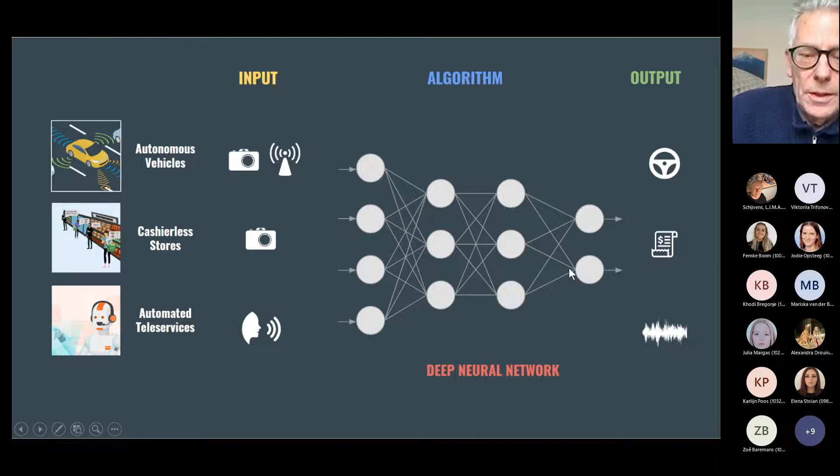Here you see also what AI is capable of, and that's why it will be automated, and why thousands of millions of people will lose their jobs. In Qatar, I had a discussion with a local architect, and he expected that 1 million of the expat jobs, that is the workers for infrastructure and the stadiums, will lose their jobs and be replaced by machines, and that only 10% of the jobs will remain.

And I think he's right, this will happen. So we have to work with this.

So it's a variation, a capitalist variation of communism actually, that the land belongs to the people, not to private owners. But it's a combination: it's privately owned, but you are entitled to get your share. That share in Dubai is quite big, more than 1,000 square meters. You can build anything on it, and you can use the garden for growing stuff.

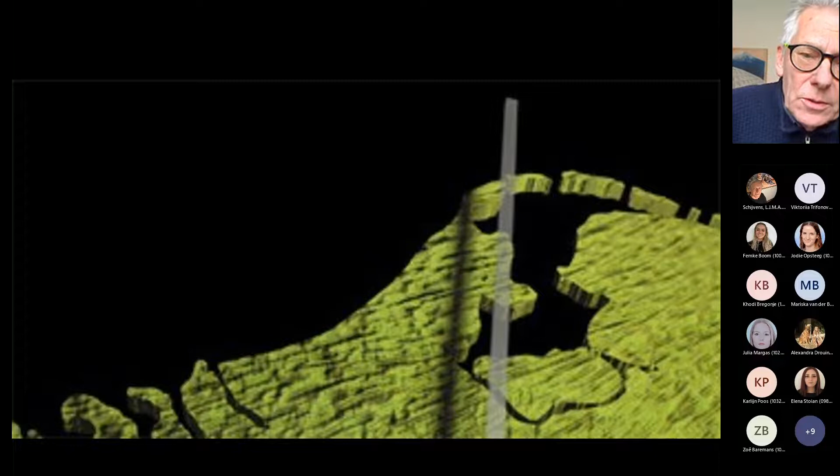And at another plan in the same period, I had this design for the polder, which is not the Flevoland, now the Marker Waard polder. Well, it didn't happen. It's now a nature reserve, which is actually a better idea.

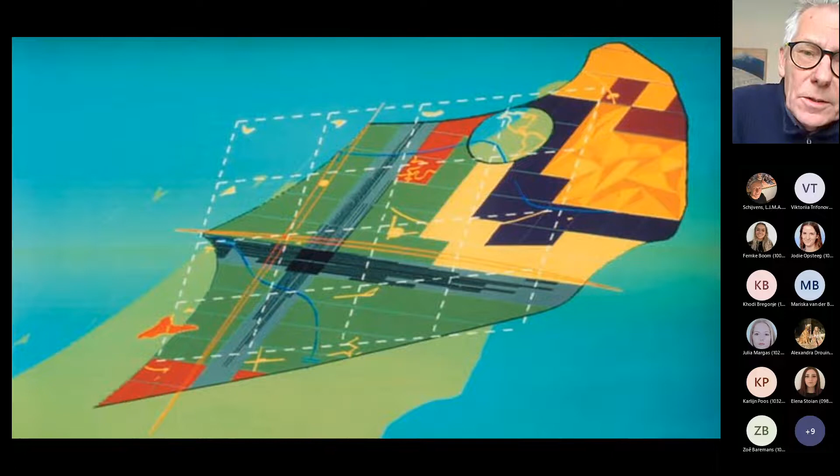But there was a competition for this, and then I had this XYZ system of endless pieces of land available for the people. And this is really a different story than traditional urban planning. It's actually allowing for growth.

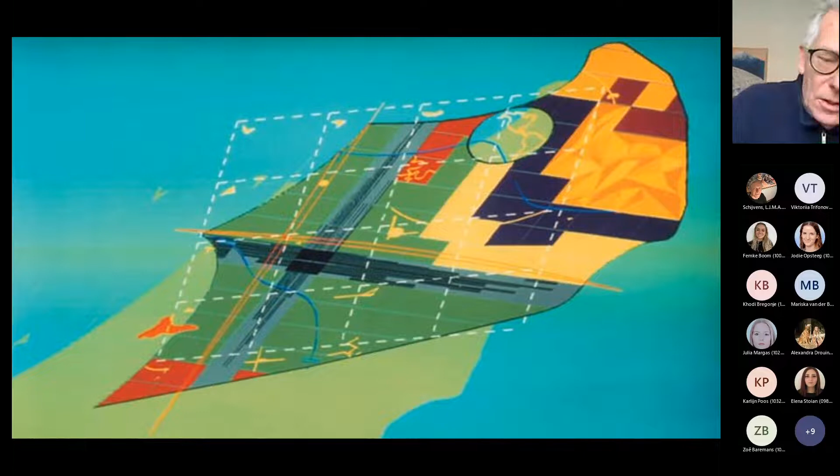One simple rule, again, just one simple rule: have a piece of land and then get your freedom within that single rule, and create complexity from that simple rule. I think it works like that. I think it would also work for energy, water, and food production.

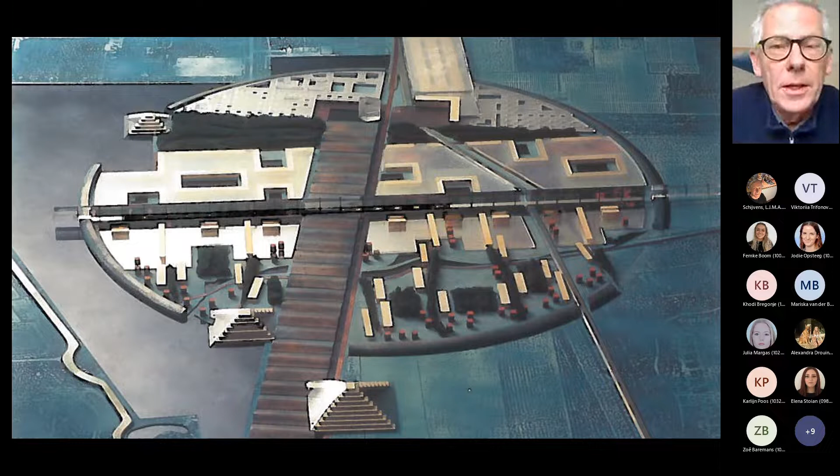So I have a few examples of our thinking, early thinking, I have to say. This is an urban design we did with Ashok Bhalotra, a well-known urbanist in Holland, of Indian origin. This is a project we did for Dordrecht, where we had 1,500 houses that produce their own food and even produce food to export.

So it's also a small factory, like a town as a small factory. At the top you see a parking with all the cars parked there. They actually produce CO2, and that will be used for the glass houses.

You see patio homes, row housing, freestanding houses, the whole normal range of housing. And you see bigger pyramids, but all of these elements, all of these typologies produce food.

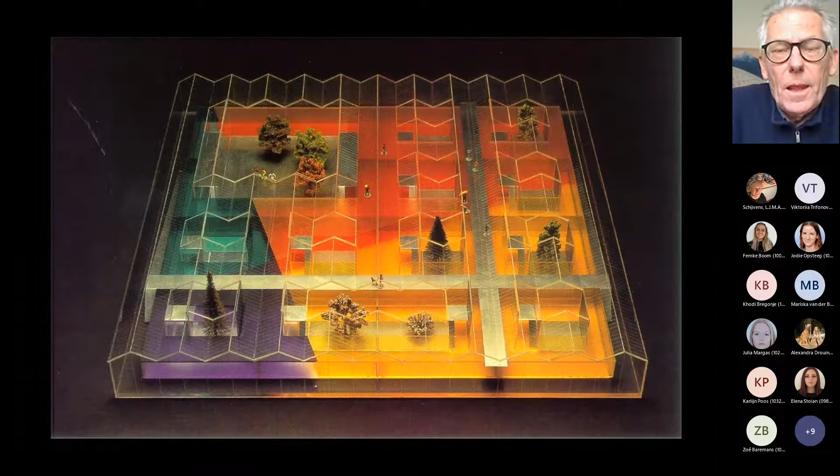This one is patio housing, so you live on the ground floor. And that was one of the ideas: maximize usable space on the ground floor and use the roof for growing food. This is both collective and individual, so it's a merge of production and consuming.

The other example in the food production chain has to be brought as close as possible to where you consume it, because that's the basic idea: produce anything as close as possible to where you actually use it or eat it.

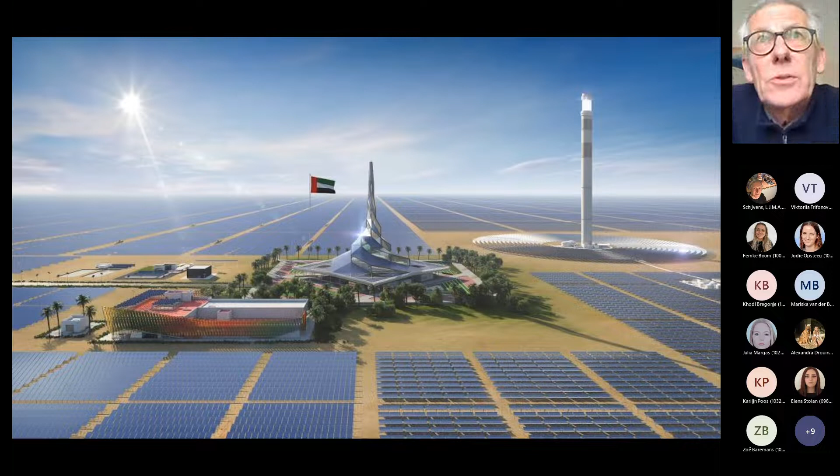So let's apply the same idea to energy: produce energy where it's used. You can consider this at three levels, I think. National level, so produce in your own country or area instead of importing gas and being dependent on the Russian pipelines, etc. I think that's a good idea, and why not.

This is again an example from Dubai. They really invest in this, and of course much of it is a PR activity in Dubai, but still they are serious about it.

The third level is, of course, your private level, your house or your apartment building, where you say okay, this is where I live and I produce energy.

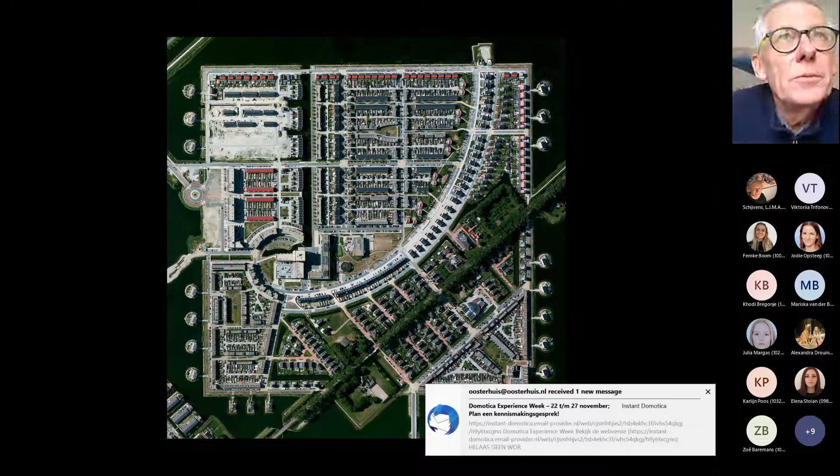So the idea is, when we divide the responsibility for producing energy each one-third — say national installations do one-third, the community does another third, and private persons do another third — if you bring that together, I think it would be an easy target to manage the clean production of energy.

So as close as possible to where you live. But again, we have to consider all the different scales where you live — it's not only your house, it's also your neighborhood, it's also your city.

Water production is, of course, just as important, actually, but more difficult to actually obtain, to create water. How do you create water?

In countries near the sea, they do, for example, desalination plants — they take it out of the sea. That's a possibility; we can do that too in the Netherlands, but there are other areas where it's much more difficult, like in the desert.

Then they have to squeeze it out of the air, by condensation. They have infrastructures like this, and these produce tens or hundreds of liters of water, potable water, drinking water, per day.

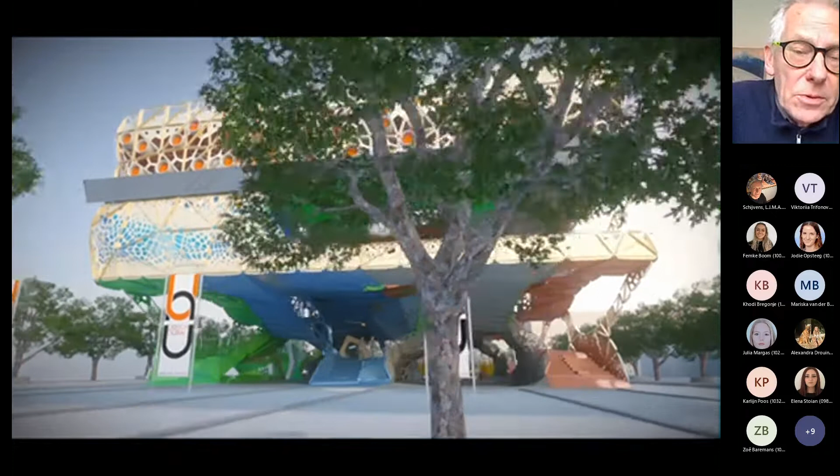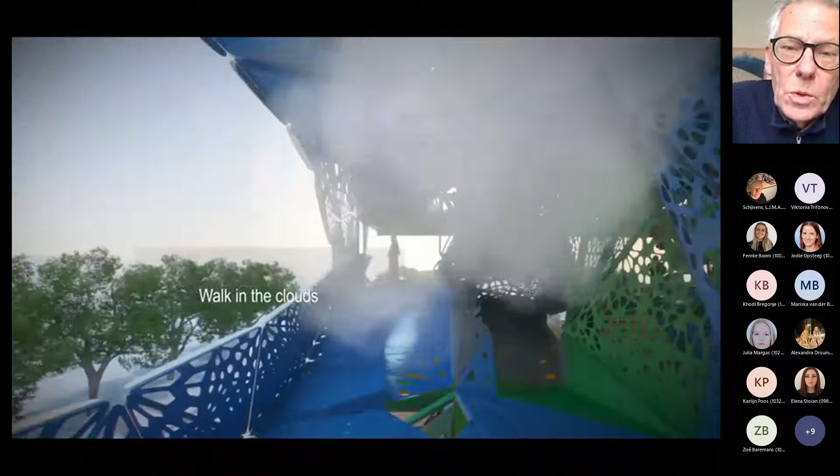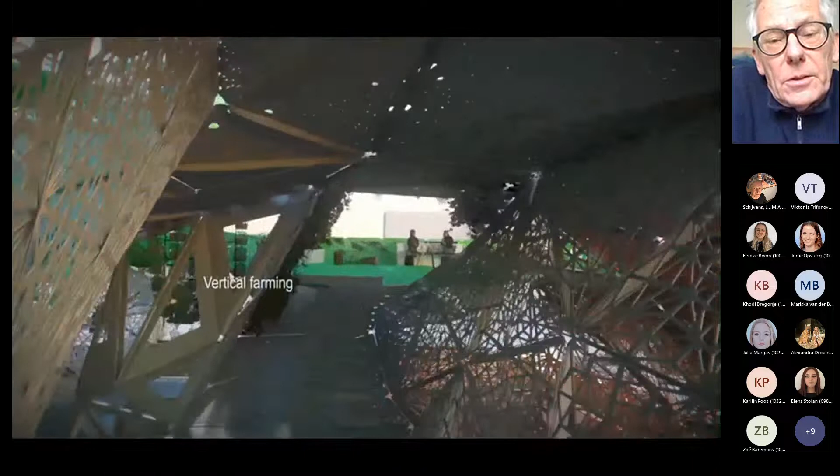This is the pavilion that we designed ourselves. It actually does exactly what I described in the earlier points. We produce energy here, by and large on the highest level, but also by integrating solar panels in each of these components. We produce food for the restaurant, like the example that I showed you, and we produce water. And the theme for the public is actually to go through this pavilion via three trajectories that explain everything about food, water, and energy. It culminates in the top where it is actually produced.

But we didn't specify exactly how. We did some calculations, but we didn't make it to the final round, so it stops here.

The other idea in this pavilion, and you can see it's a very particular way of designing, is to have one component for floors, for balustrades, for facades, for anything basically, in a parametric system that fits to all situations. So with one component parametrically designed and robotically produced, we can make anything.

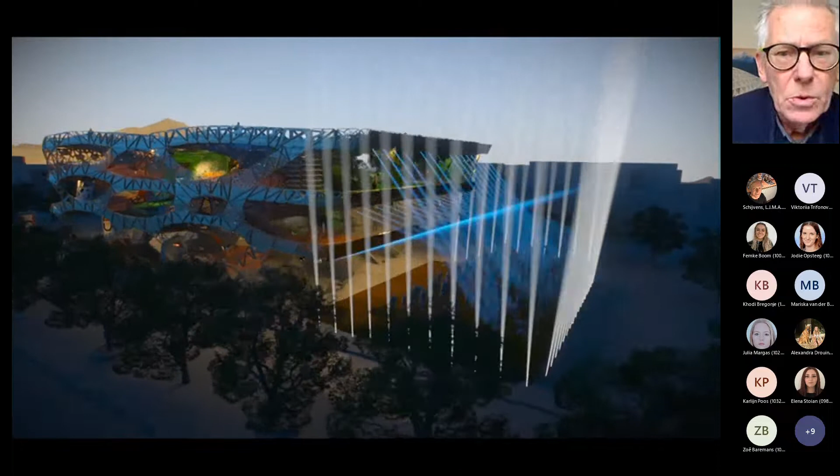And this making anything is really an important issue, because complexity is no longer something that is exceptional, but complexity has become something that is normal. It's the new normal, another normal, which emerges out from simple rules.

So basically you cannot do much simpler than this. It's really one component, and the position of that component, the array, the numbers, the frequency of the number of components, the position of it, defines what exactly is the shape, what are the dimensions, and what is the level of perforations, etc. So this one component fixes everything.

I said okay, I have these three elements: farming, water harvesting, and energy production. I put three extensions on top of this building to produce what is needed for this location. And it's quite a big thing, so these extensions are quite big. I think this looks to me very much real.

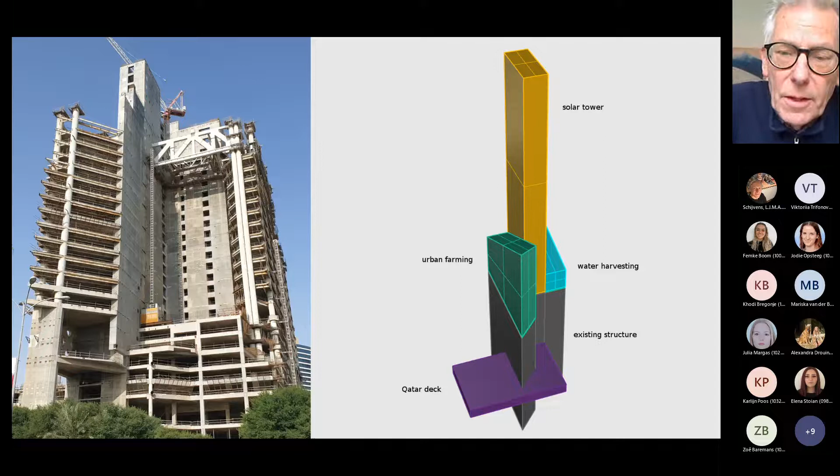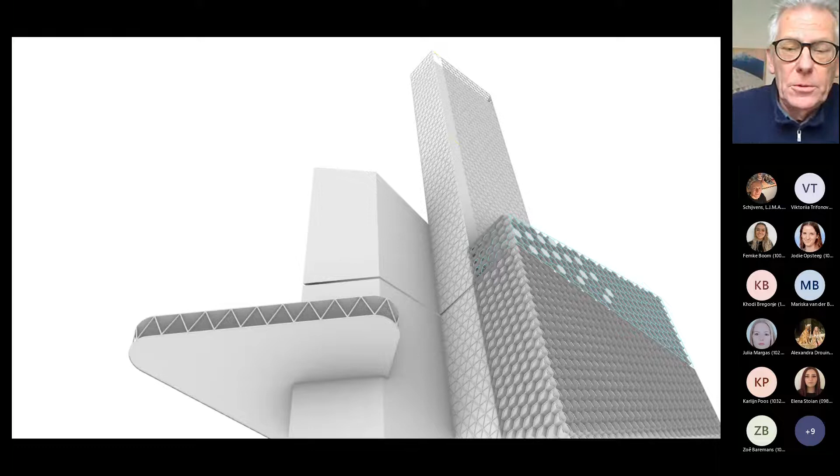What is the task, which is actually the challenge, if you are really serious about producing more locally and consuming what you have produced locally? The building becomes bigger, also more transparent, and becomes a small factory almost. Each building, a house, an office building, a city, and this of course you would need an architecture to unify into one structure, but that's another story. It's first about the calculations: what is exactly the need for the production of food, water, and energy.

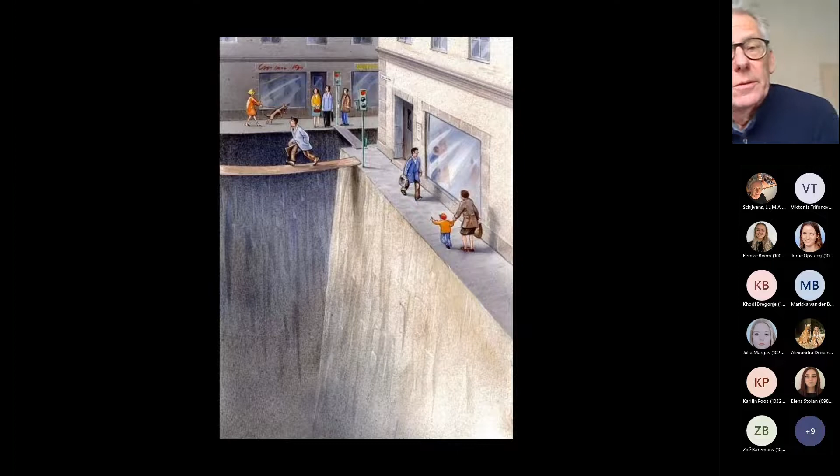Okay, let's look at autonomous transportation. These are one of the other elements that needs to be linked to the previous ones to become successful, because none of these issues is a standalone issue. If you decide to go 100% for only one of these, not much will happen. Only when you link everything together will it become something more successful.

So this picture shows the real situation of inner cities. I think it's quite evocative. The pavement is very small. The street is just an abyss. It's a big canyon. You cannot go there, and going to the other side of the street is also a challenge and quite risky.

Automated, autonomous vehicles are vehicles that look to each other, like birds in a swarm, exactly like that. They only look to nearest neighbors, and they measure distance, they measure speed, they measure direction, and they adjust to each other. No one is leading. So if one of these cars steps ahead and goes to the front, he will be looked at by the others in the same way as he is looking at the neighbors right now. That's the condition of the swarm.

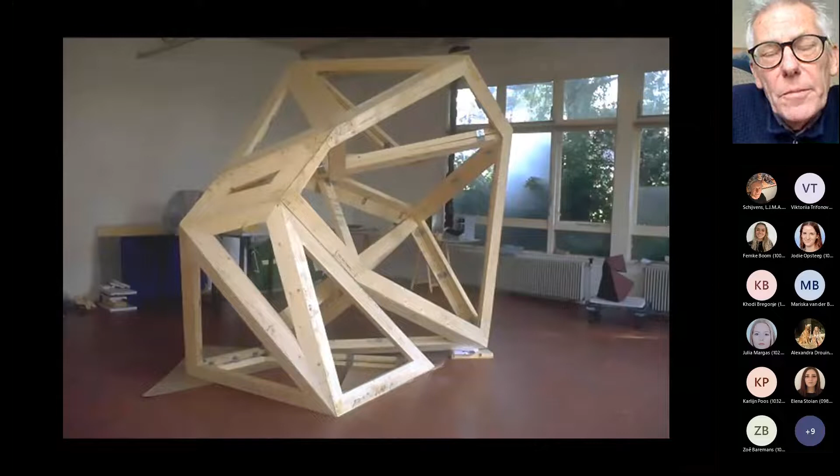And then assemble them to form the whole. So this is, in very short, the method we have applied since for almost any of our projects: it starts digital, then you translate your digital sketch into components, and then you assemble the components to form the larger picture, the larger whole.

This was meant as a sculpture, but we could also see it as a prototype for a larger building. This happened in 1991, so this is 30 years ago.

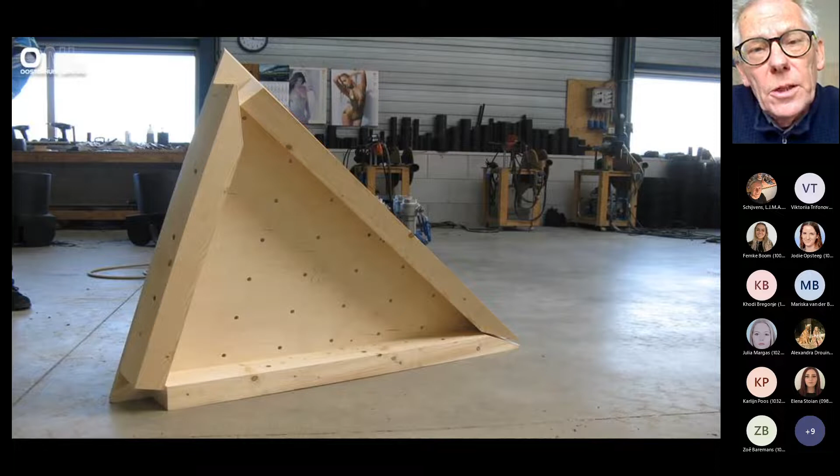10 years ago, I did this project for a climbing wall where I had this component developed much farther, fully parametric. So the previous one was much more analog, actually, very experimental. This is fully scripted.

Each component of the climbing wall is different, but all of these components are looking to each other and they adjust to each other to form the bigger picture.

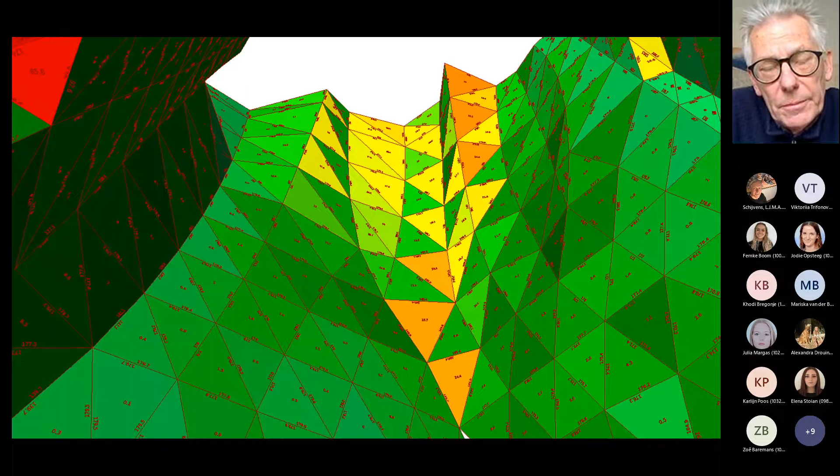In the script, you also measure the angles. If the angle is too big, you have this red alert, which you see in the left. And then we have to adjust the model manually to reduce those excessive angles, because we don't want exceptions.

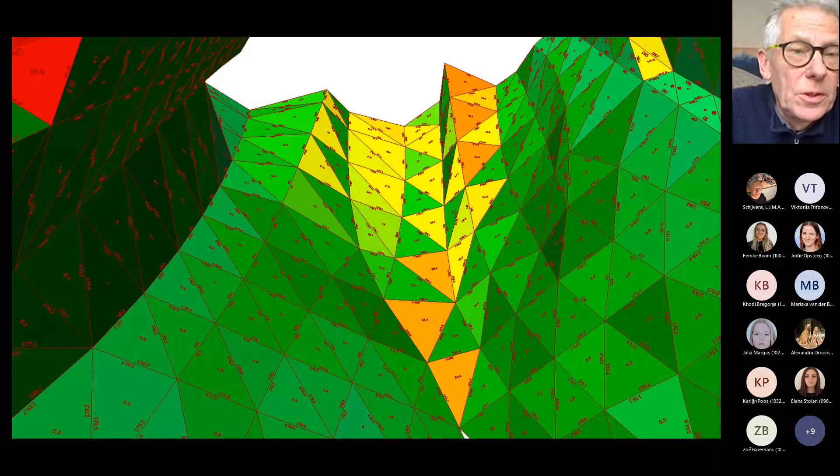We want to have a system, which sets the guidelines, sets the framework, and we want to work within that system. That system is based on this one single rule that creates a pleasant kind of diversity, where every single component can be different, not necessarily, but can be different, and is assembled to form the whole.

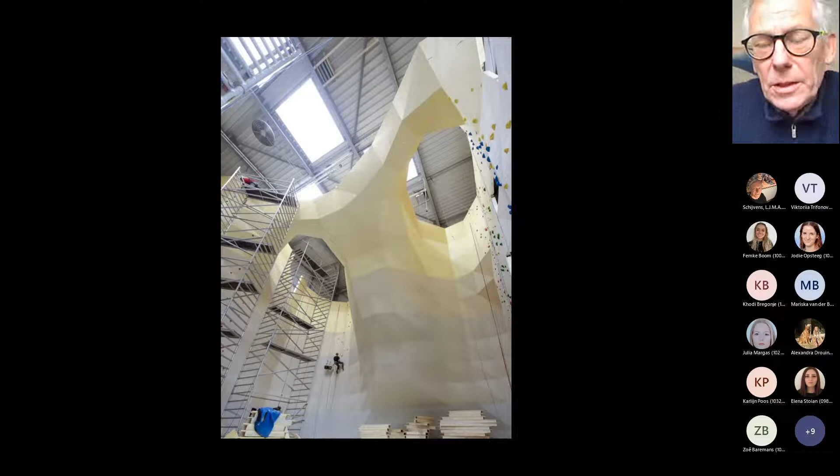And it's just as simple as that. You have this stack of components that you put on the ground. They are all numbered, they all have their identity. This is crucial. Everything needs to have an identity.

Like every computer has an identity, like every cell phone has an identity. Every single component that connects to another component has to have an identity. It's not the emotional identity I'm thinking of, but simply something that is needed to be addressed, to receive information, to process information, and to send out information in a different form, which is a difficult way to describe a dialogue. So this is what happens.

Then what can happen, and what we realized in many different versions, simple components can create a form of complexity that you otherwise would not be able to do.

So we use this technology to transform complexity into the norm, into that other norm. Only because we can control the system from scratch, we can control the system from scratch with the maker, which is the steel manufacturer.

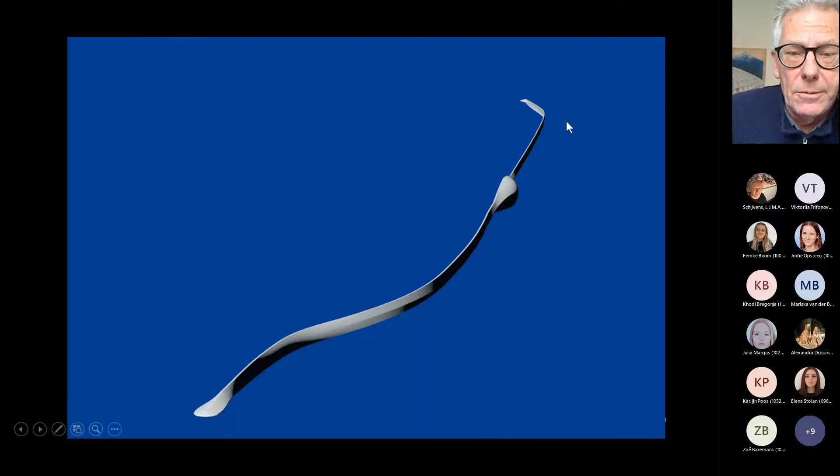The cockpit that I showed is only part of a bigger thing, which is an acoustic barrier. And here you see already what I meant with looking at cars. You really have to look at these fold lines, which are normal in cars, but not in buildings, really.

And what these fold lines do is reflect the upper part, reflecting the sky in the upper part, so it looks lighter, and reflecting the earth in the lower part, so it looks darker.

That makes it much more elegant, and it makes the building look longer than it is, and that's what we want. We want this stretched idea of the 1.6 kilometer experience driving past this acoustic barrier. Driving past means you experience gradual changes in the geometry, from convex to concave, pumping up where the cockpit is, and then fading out again.

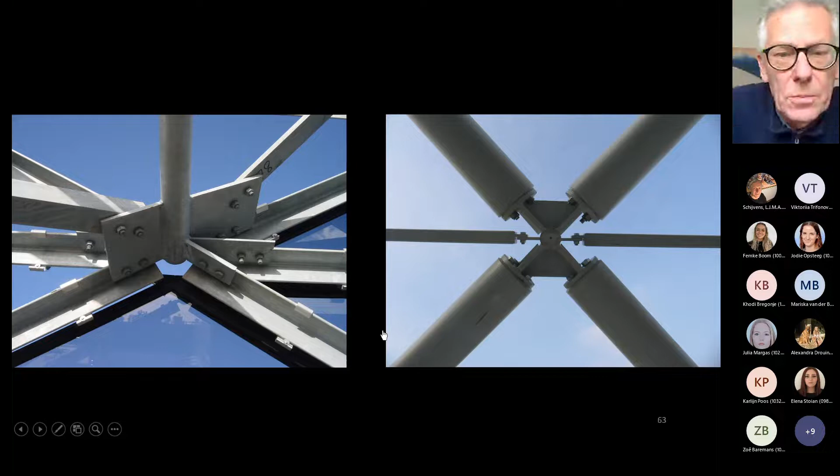One component adjusts to this difference in geometry, the pumping up of the volume. These are the two very simple details that are at the basis of it. But remember, none of these is the same—each node is different, has its own number.

Each component and subcomponent has its own number and is connected to each other in this one particular way. All this comes out of our scripts. So all these triangles for the glass plates all have their unique dimensions. Doesn't look like it from here, but it's true. Same for the cockpit itself. We processed the whole design in ProEngineer; today you would use Grasshopper, as we did for the climbing wall.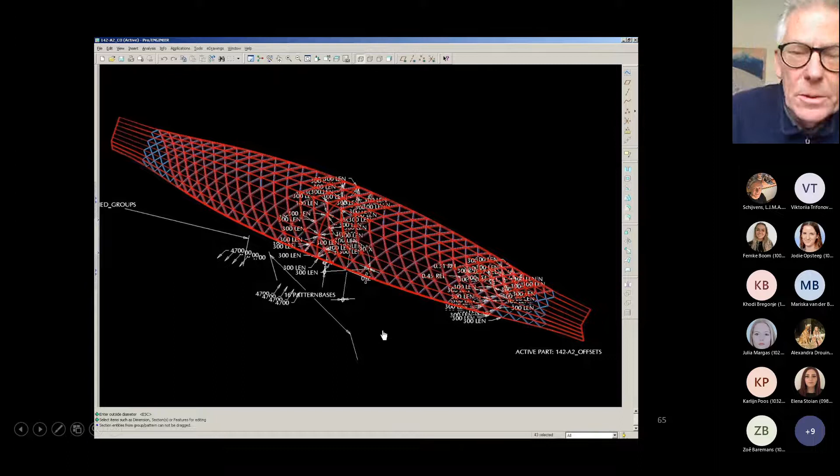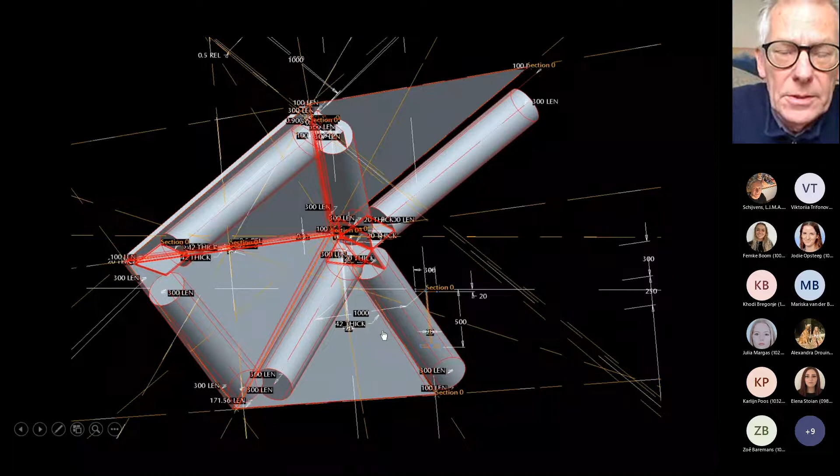And here you see the painfully exact detail of every single node, and the data are extracted from this node and communicated with the machines. All the differences in angles, all the dimensions of the components, subcomponents, all the parts, the position of the bolts—everything is in this detail. And this one detail actually is the building. There's nothing else. This is it.

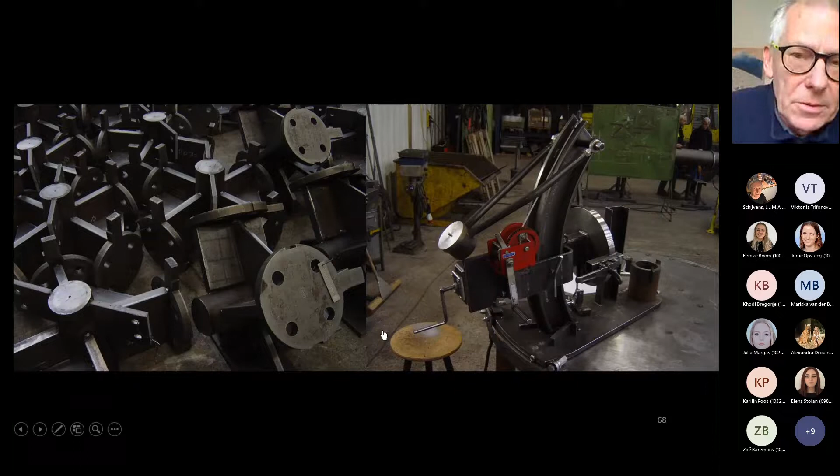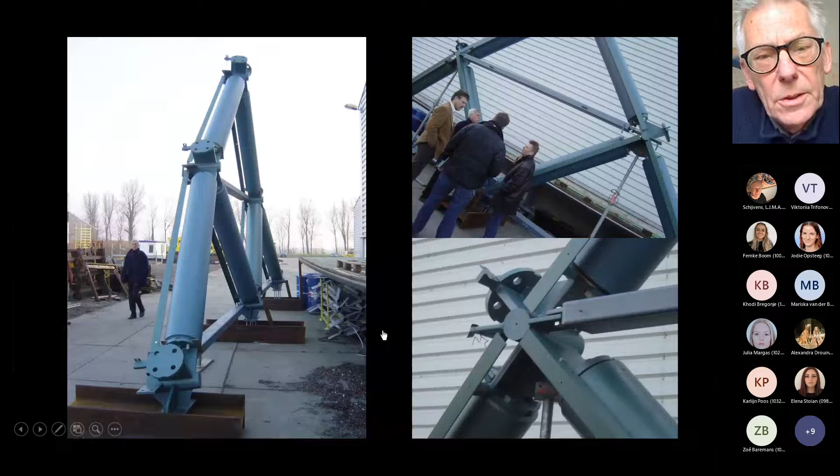So this is the extreme simplicity, a simple rule that creates the diversity. Don't think it's difficult to make—it's not. You can use any workshop and your inventiveness to build a machine to control all these angles. It's not difficult, it's actually very doable, and it has a lot of advantages because you don't need a lot of other players.

You don't need many consultants, you don't need that contractor subcontracting the steel manufacturer. You work with the steel manufacturer directly, and he has the calculation office to make all the calculations for the nodes. You don't need an engineer for that, really not.

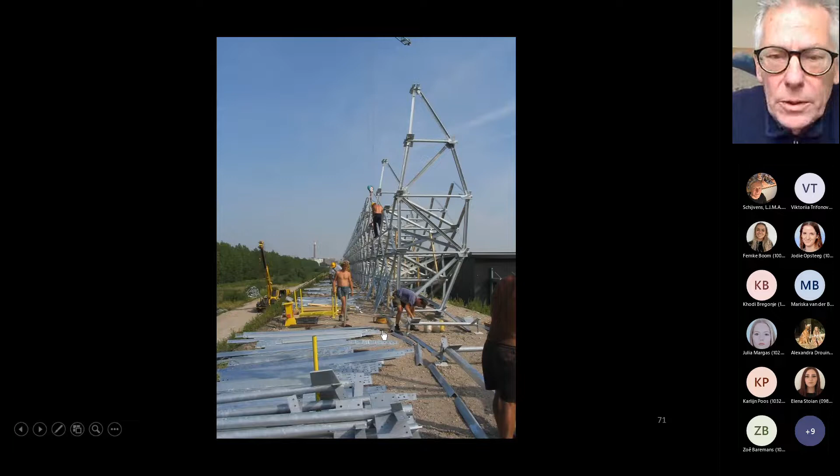Building a prototype is necessary to see how it behaves, and this is very typical for any larger project—you build prototypes first. If it's okay, then you're good to go and you start assembling it, just a few people doing 30 meters a day, building up the acoustic barrier and the cockpit.

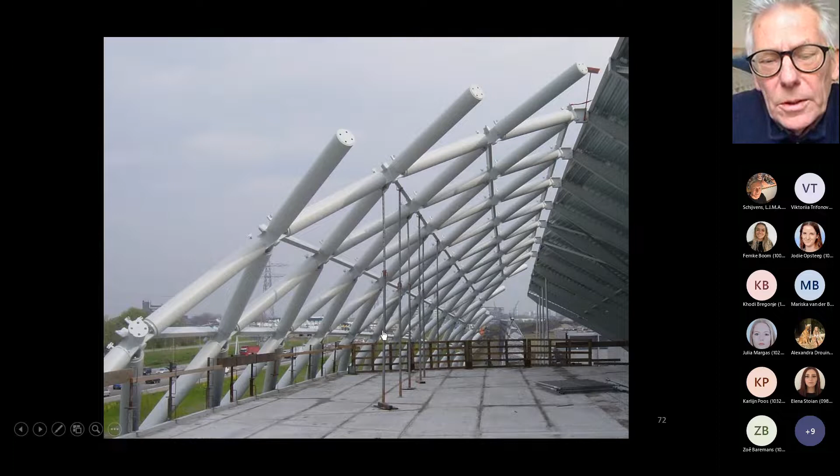So you see how it works—you simply connect one component to the other and it builds itself. You don't need scaffolding. The vertical components you see there are not scaffolding; they don't bear the structure, they're just for checking the dimensions.

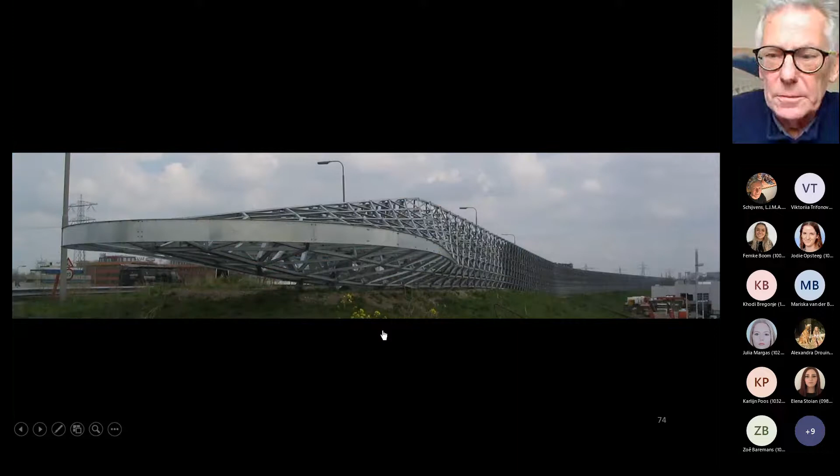Here you see the two structures being built and approaching each other. We had two clients, one for the cockpit, one for the acoustic barrier, and we synchronized them into one structure—they didn't have to talk to each other. Then it comes together smoothly, effortlessly, and you see the folding lines being transferred from the acoustic barrier into the cockpit.

But these are two separate buildings. They don't even touch each other. They don't have to—it's just the visual aspect that has to be continuous.

Well, you can actually recognize a good building if the logo of the building is actually connected to it, if they use the building itself as their logo. That's what they call iconic, of course. But this is literally iconic—they use it as an icon, which is a sort of sign.

Iconic in this sense, I very much support, and it means the building has character. It's not about being strange or wild or just decorative in some way. No, it's about being essential, and being able to use the essence of the design as an icon.

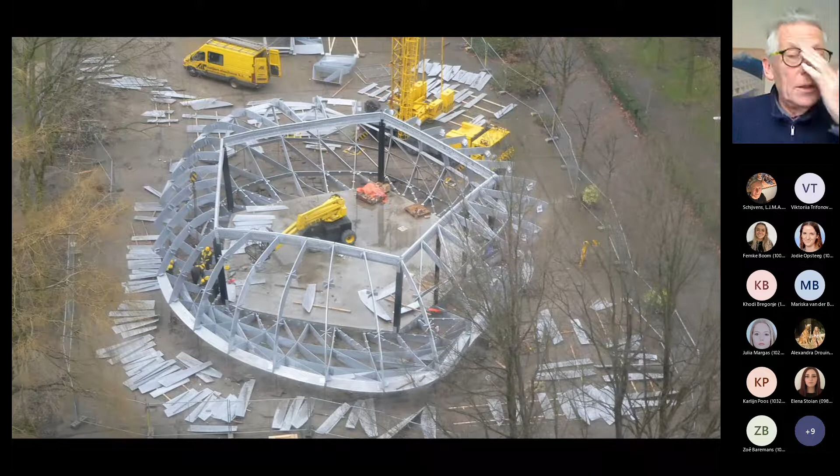More examples, smaller pavilions like the IWeb in front of the faculty. Again, one building, one detail, an assembly of components. I can show many of these projects, and they have the same principle all over, but they're all different, and they don't even look like each other.

This is the interior, where we used polyurea foam for the insulation and for the seating arrangement. The building itself forms actually the seating arrangement around the central arena, which is the virtual working space. We use this as the proto-space laboratory of hyperbody.

This is the Balna, so you pronounced it properly - the Balna in Budapest. This is the interior, so here we have the same system, seemingly the same system, because it has been built as the cockpit, but made in a different way. Actually, they used welding on site, which I was very much against, and which caused some imprecision in the whole structure. But from a distance, it looks okay.

It's also considered a very successful merge of the traditional and the new, and the public, and actually also the critics and experts - they really like this building as much as we do.

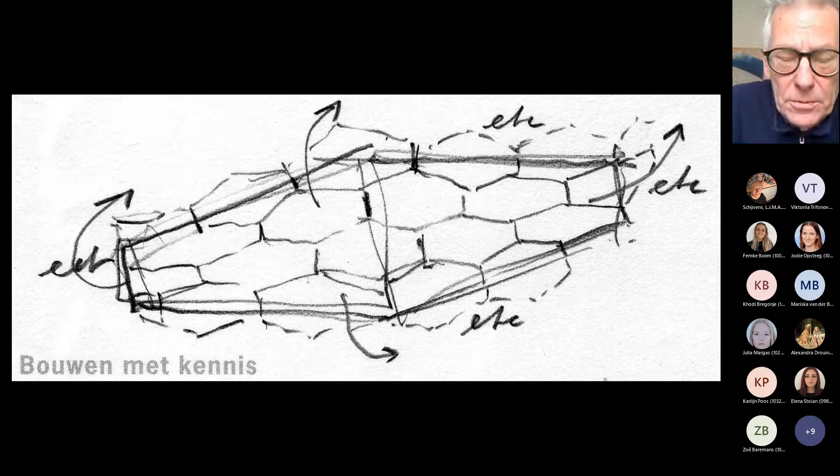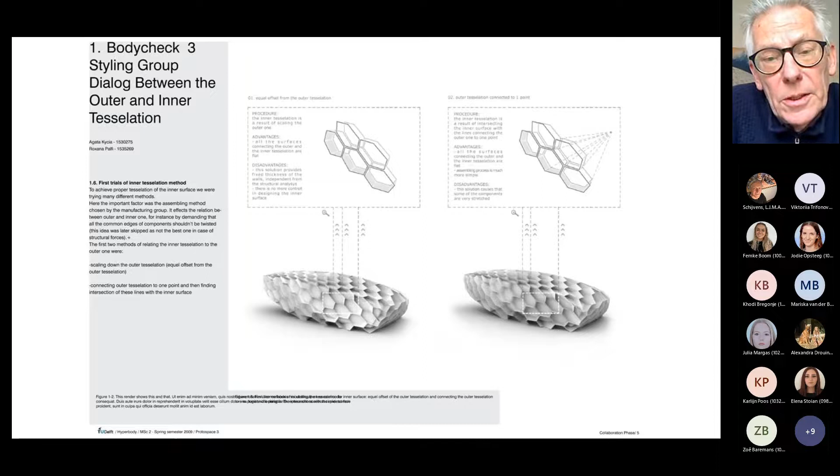Okay, let's have a closer look at the idea of the components. Each design deserves its own unique component, and it's always different because it really depends on what you are designing. So here, with a number of students, we tried to have one component that is part of the swarm of components that does everything - the insulation, the windows if you need to look outside, the structural properties, the tactile properties, everything, the aesthetics, the styling issues.

And we came up with this proposal. We called it Protospace 4.0. We wanted to build a new pavilion, but unfortunately, due to the crisis and the reduction in budgets at universities, we didn't get the budget to build a new pavilion for ourselves, so we had to limit ourselves to a prototype.

An aspect that is especially important here, and for anything you do, is the connection between the components. It's not the component itself that is important, but just as well the connections between the components. This is the analog version, the connective analog version of communicating in real time, the connectedness via sensors and actuators. In the static building version of connectivity, it's just as important to look at the connection, and the connection has to be integrated in the system, not something additional - no wet connections, only dry connections, so you can assemble it and also take it apart and build it somewhere else again if needed.

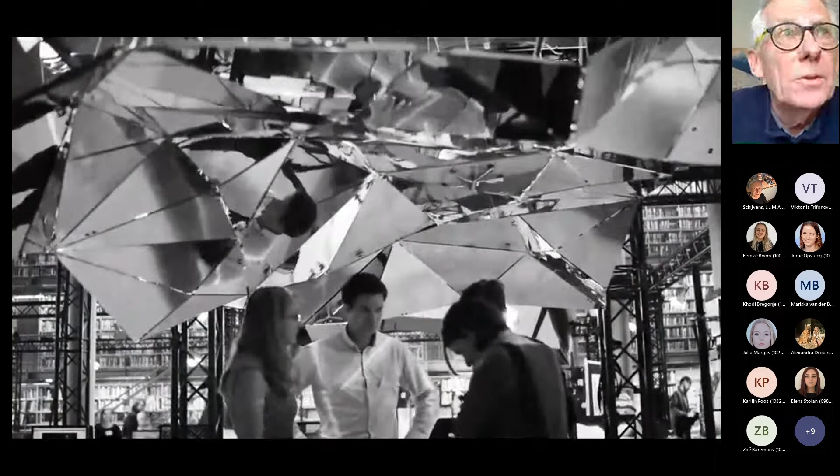Again, it's not difficult - it's just a matter of teaching yourself Grasshopper, in this case, and then do whatever you want to do. It's almost a democratized way of designing, because basically the way of designing is also open for other parties. It's a very transparent way of design. It's also an inclusive way, and it allows for participation, which is one of the main promises of interconnectivity between things and people.

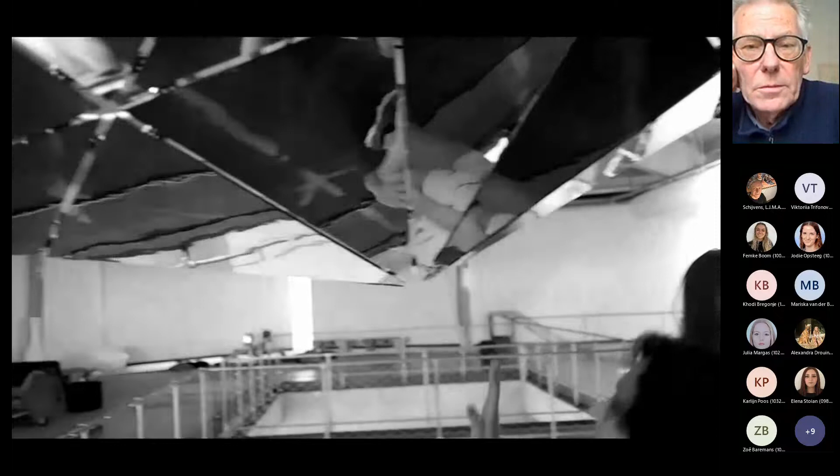This is an example of an interactive installation - an interactive mirror.

It's not difficult to imagine. Gus, your sound is not good. Oh, we can do without sound. No, it's better now. But because this was the video sound. Oh, okay, so forget about the sound, it's not important.

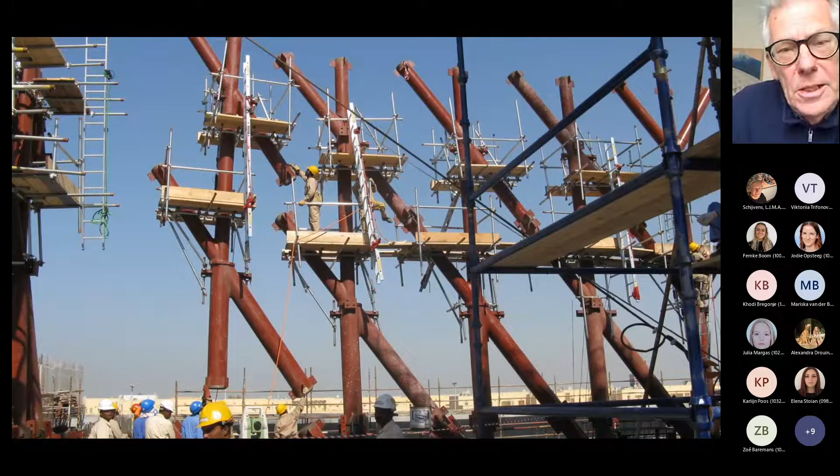Okay, then we apply it to many other buildings. This is a building in Abu Dhabi, and you see it has a completely different look. But again, same principle, same principles of that component that is leading everything, leading the main structure, leading the facade, interior finishing, everything. And it really works on all levels.

The client wanted to see the steel because it was an offshore builder. He really liked the presence of these steel structures, so that's why we left it exposed.

Now a completely different thing, because we are talking to first-year students. This is a first-year project done at Qatar University, and these students didn't know anything about computation, but it was interesting to see how we could teach the principles of parametric design in an analog way. I have to say, because I did this together with Ilona, we asked the students to find a component that is different from other components, so not a repetitive or repeating component, but a unique component, and put them together in any way to design a big urban public sculpture.

So you have to imagine these are 60 meters high, placed in a public space, also interactive in some way. So you see completely different interventions by the students.

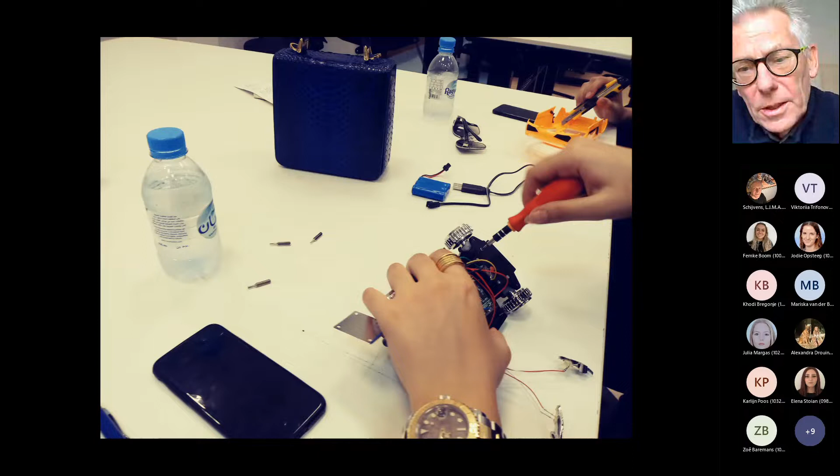And the most interesting one was this one, where we disassembled a vacuum cleaner, a robot vacuum cleaner, and saw how that worked. I also asked the students to put it together again and make it work, which was the biggest challenge, of course, but most of them succeeded. So it was very interesting.

The other project I want to show you from Qatar is this robotic project we did. Here you see Ilona, and that was our friend Jasmine in Qatar - she's an architect. And we used these robots, these vacuum cleaners, to create two paintings.

One additive, where you add paint, and one subtractive, where you subtract flour from a field of flour that we distributed on the floor. Here you see how it works - we connected an acrylic marker to the end of the vacuum cleaner for the additive painting, and we programmed the other vacuum cleaner to go in circles for the subtractive painting. So these robots can be programmed - that's interesting. You can actually use them as your own extension, as a painter.

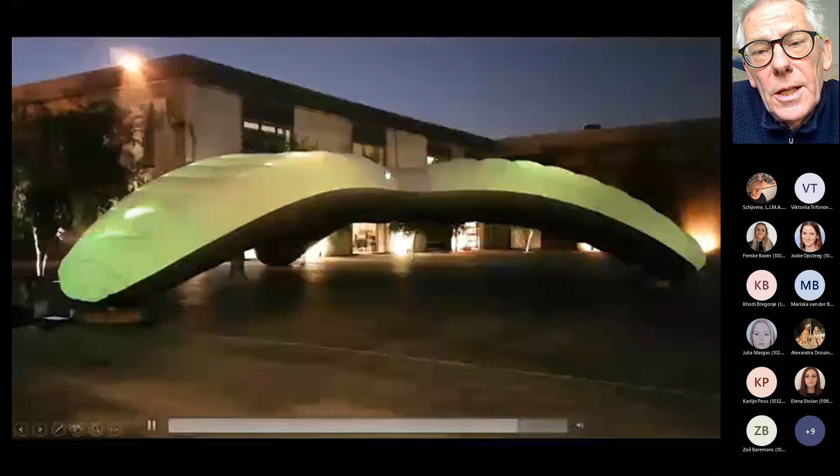You don't hear it right now, but it changes the character of the sounds, and then it also changes its shape, because the sectors in the middle are alternately deflated and inflated. It deflates the whole thing lower, almost crashes it, and inflates - different levels of interaction.

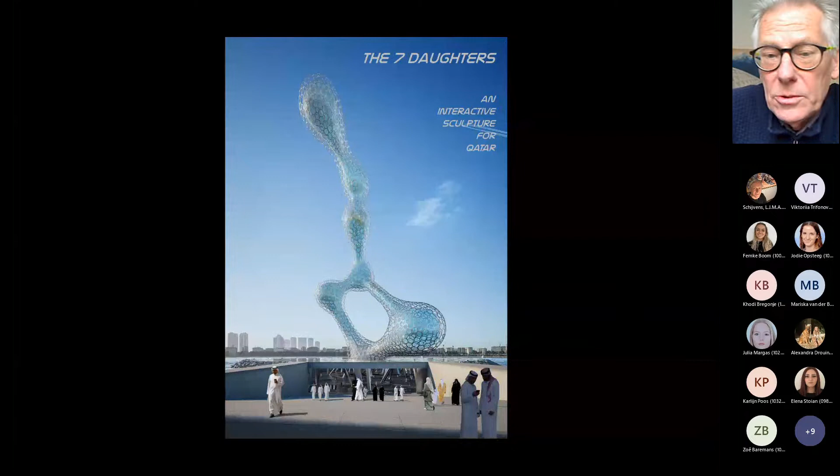Now, this project I really want to show because it's an ongoing thing - it's not built yet, we are working on it, but it's an interactive sculpture for Qatar. It's built on the idea of a sign in the stars, a constellation of the Big Bear, and these stars shine with different strengths, different radiosity, different luminosity, and they have different distances from the Earth. So we defined a three-dimensional sculpture which reflects these parameters, and connected them with accessible tubes.

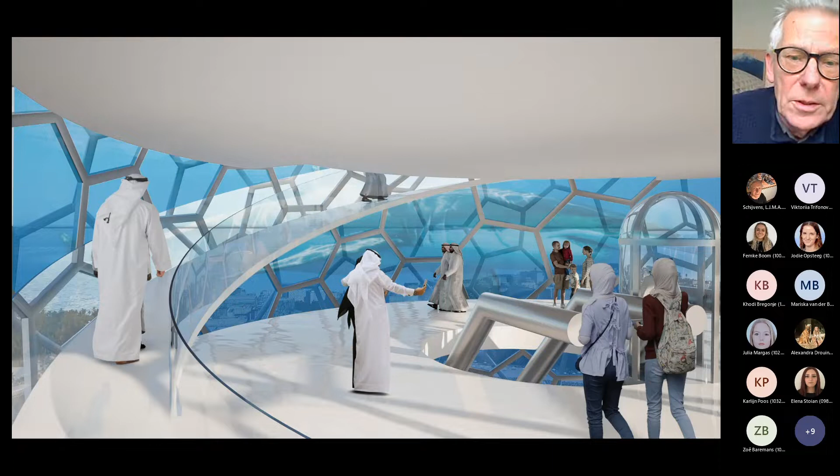There's an infrastructure inside, so you can go from sphere to sphere, and these spheres represent the achievements of female people in Qatar. So it's a monument for feminism, basically, and it's accessible for everyone. In these platforms, there are projections of 7 different themes - that's also why it's called the Seven Daughters. The number 7 comes from this storyline from Qatar's history.

The desert people were always looking to the stars for orientation, and the Big Bear was an important one of those. They had this story of the 7 daughters, where 7 of these stars were visible all the time, and 1 star was appearing every now and then, disappearing again.

And this star is the so-called murderer of the father of the seven daughters, and the seven daughters were always chasing this murderer. So this is a continuity at the night skies, and they connect the story to it because this murderer appears every now and then, then disappears again. So it's this continuous story of the good and the bad, I think.

But we applied this to the rise of the culture, the emancipation of women in Qatar, which is a real thing. I would say it's unheard of how fast this is happening. If you consider our own history and how long it took to get voting power, etc. They do everything in 30 years, and now they are almost in that phase where men and women are equally treated, but not completely. So it's still very much in process, so to say, but you can see it happening, and we found that interesting. I think it would need some sort of structure to represent this process, so this is the idea behind it.

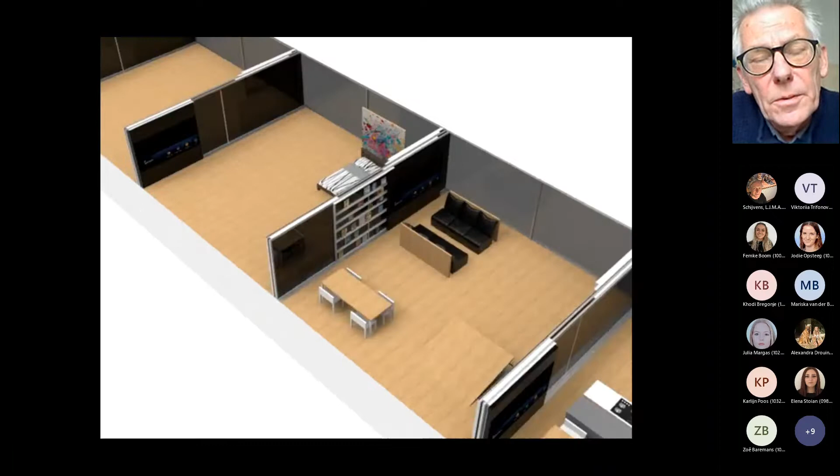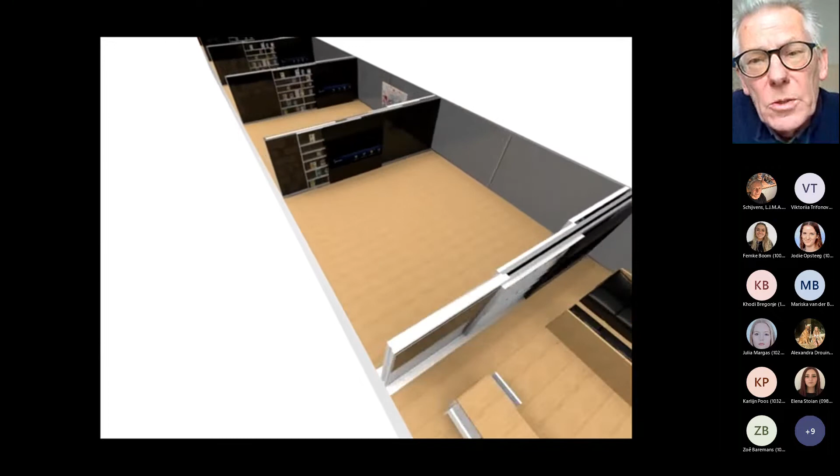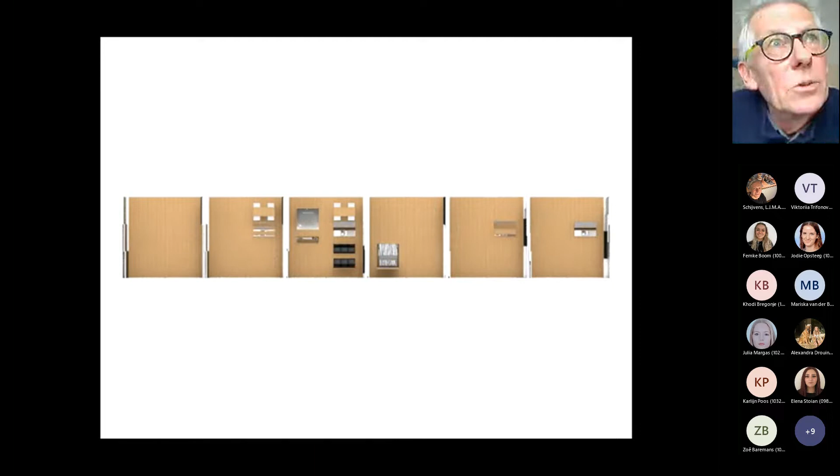So there are a lot of improvements left at these levels, also in banking, in booking. It's too much to discuss now, but I'll just show you this image where you have the configuration of your space on command. You can configure your own space, maybe a 50 square meter space in a nice building. And instead of just booking a hotel, you book any activity for any length of time in any place. That's the idea. On the basis of this, it's the idea that we are new international nomadic citizens, that we want to work anywhere at any time on any project, and less have a stable home base as usual, but are more free in our doings.

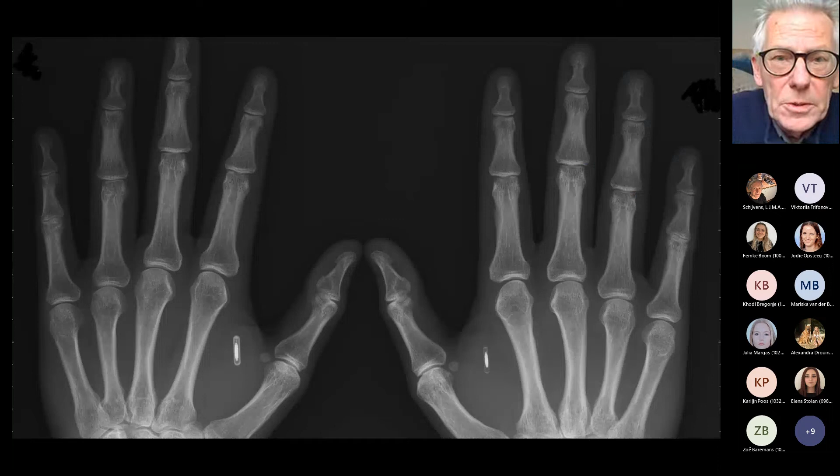And all that would be made possible by simple rules, and complexity emerges out of that. Same for banking. We can do much better than being dependent on the big banks that are so-called too big to fail. No, they are not too big to fail, but we need an alternative, which is probably very much based on blockchain technology and peer-to-peer communication, validation of transactions.

So, to conclude, in my opinion the new normal is a combination of all of the above. One single thing wouldn't do much, wouldn't put a dent in the butter, so to say. So you need to work on all levels simultaneously. And I don't think politicians will be very helpful these days. As has been proven at COP26, nothing came out of it, no real promises. So things really have to be done from the ground up on all levels - national level, neighborhood level, individual level - and all be connected, all things and people connected in very intensive bi-directional networks.

I think that was my last slide. So here I end, Laura, and the students are still there, open to discussion.